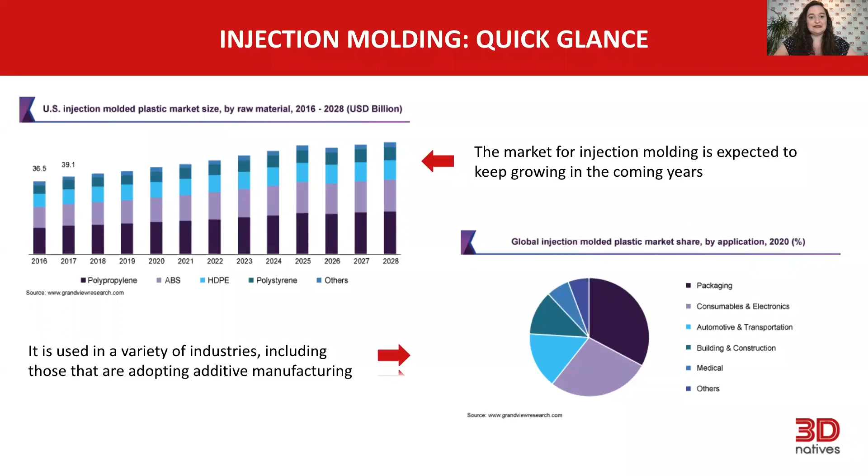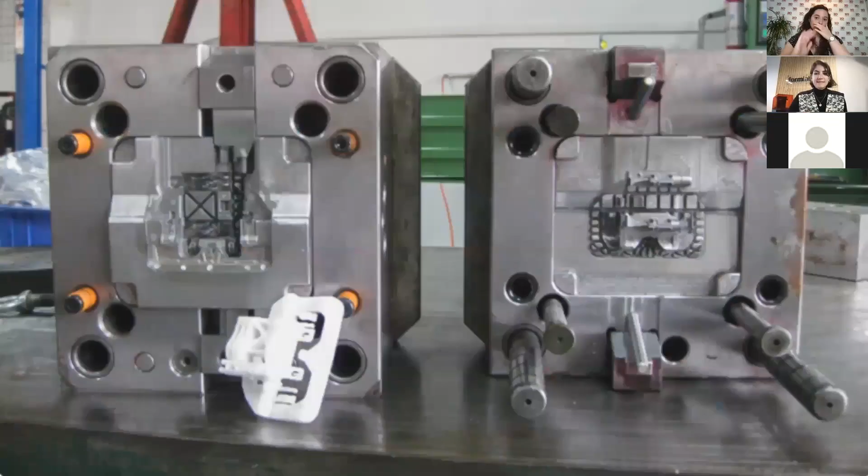One of the downsides and difficulties in injection molding is tooling. As I mentioned, it requires the use of a mold to shape the part, and molds can be very expensive, generating quite some lead time to produce. Here's an example of a mold. It's traditionally made of metal by CNC machining most of the time. Typically a mold can cost anywhere from 2,000 to 100,000 euro, depending on the geometry. If it's a complex design, complex geometries, it will be much more expensive, and it can take 4 to 8 weeks to produce. So this is mold making for injection molding. It's not really flexible, and it can really slow down your process and your product development.

So we'll be very curious to know, how do you currently manufacture your injection molds? You'll have another poll question coming into your screen right now, and if you could share your current process.

So are you doing in-house metal machining or outsourcing metal mold, or are you already using 3D printed mold, either in-house or outsourced? If you're using any other method, I'll also be curious to know.

So I'll let a little bit of time pass. I guess Madeleine, just let me know whenever it's answered already. Perfect, and now we can see the result. All right, so actually most of the people here are outsourcing metal mold.

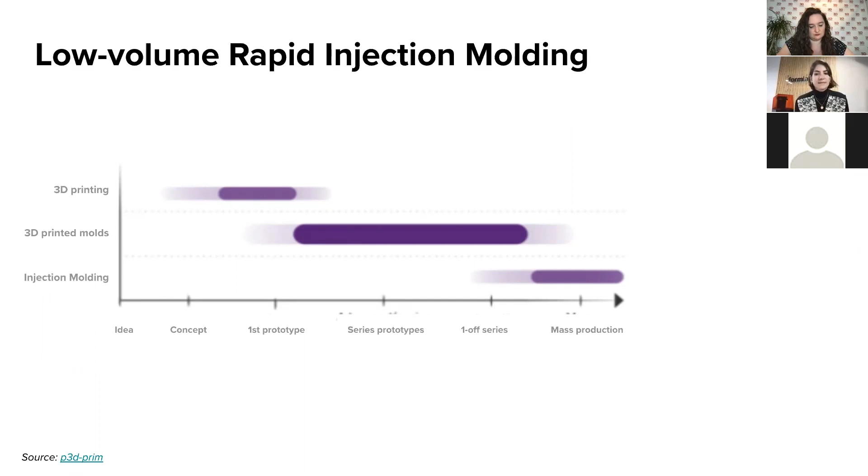That being said, I'd be curious to know why you are interested in doing low volume production, low volume injection molding. You'll have another poll question coming to your screen right now.

I don't see the poll question. Ah, I can't hear you, Madeleine. Ah, perfect. All right, so I'll be curious to know why you are interested in this application. Actually, I didn't put 'other' in the solution, but if you have other uses, feel free to share in the chat or Q&A. Ah yeah, it should be multiple choice, so maybe just pick the first use that you're having. That's a good point. Oh right, interesting—limited series of end parts. That's interesting, I thought it would be more for prototypes, but I guess this is for maybe both options. But it's interesting to see the division between those three. Great, thanks for answering this.

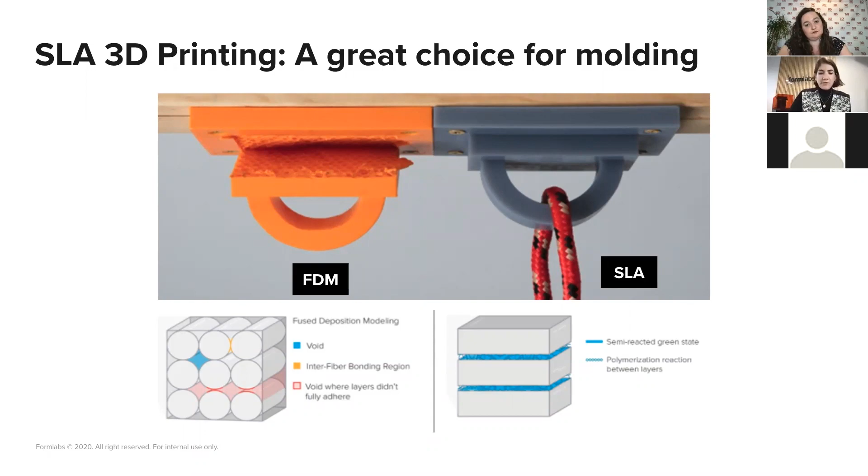And at Formlabs, we have a complete ecosystem for SLA, and we also release materials that have high thermal resistance and are really adequate for molding. This is an affordable and accessible ecosystem that is easy to implement, operate, and maintain.

So this is a good choice if you are new to this process and want to set up in your prototyping lab and just start right away without too much pain, let's say.

Now I want to show a video made with one of our partners in China that has been trying this application to validate if we can do 3D printed molds for low volume injection molding. They've been printing with our Rigid 10K resin, and they've been printing some housing boxes. So I'll just show the video.

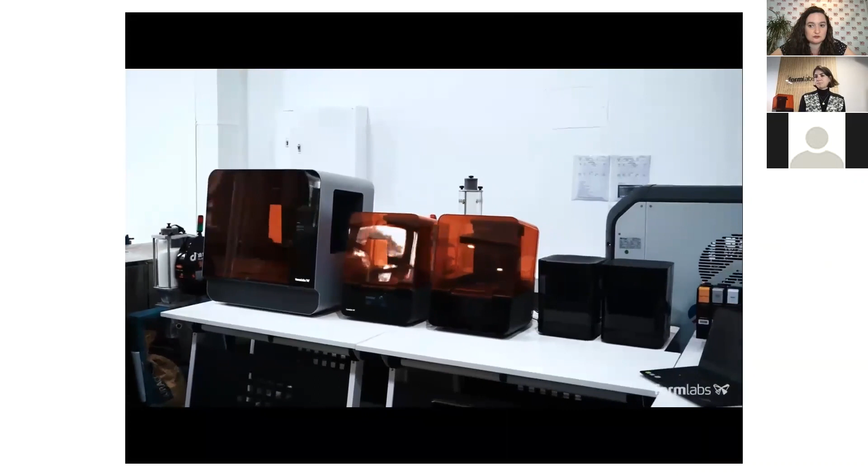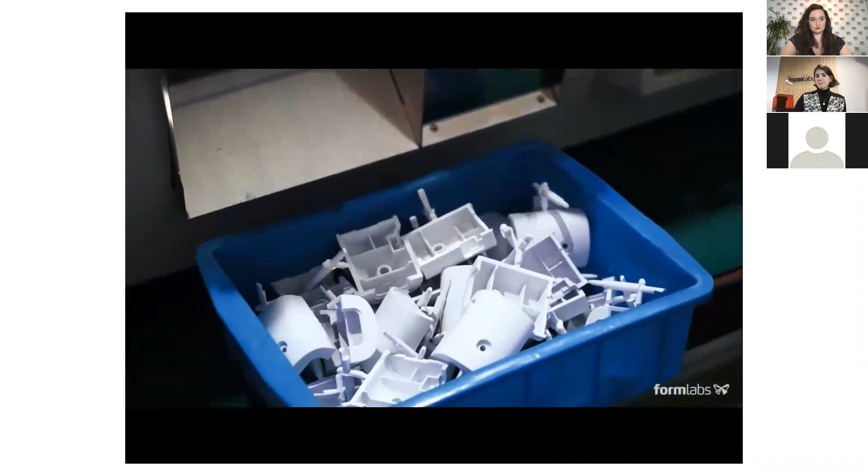Using 3D printers to fabricate molds for low-volume injection molding can reduce costs, shorten lead times, and help bring better products to market. Founded in 2005, Multiplus provides manufacturing services to over 250 clients per year, many of which require small batch production. We've partnered with Multiplus to walk you through the steps of the injection molding process using 3D printed molds.

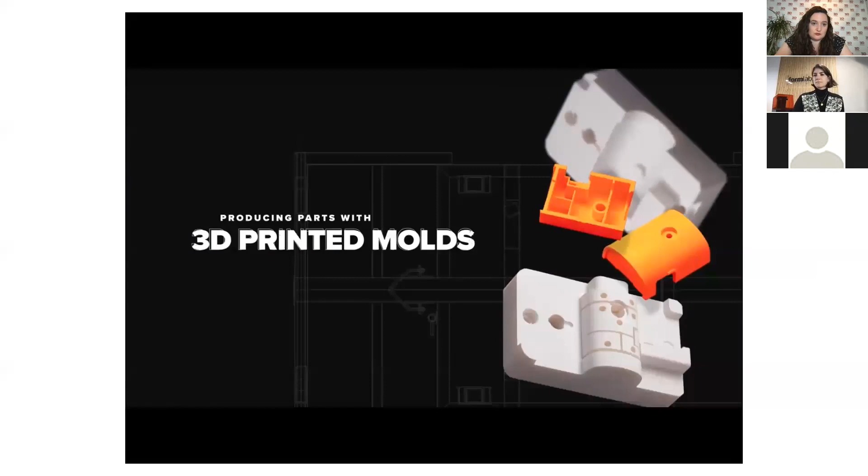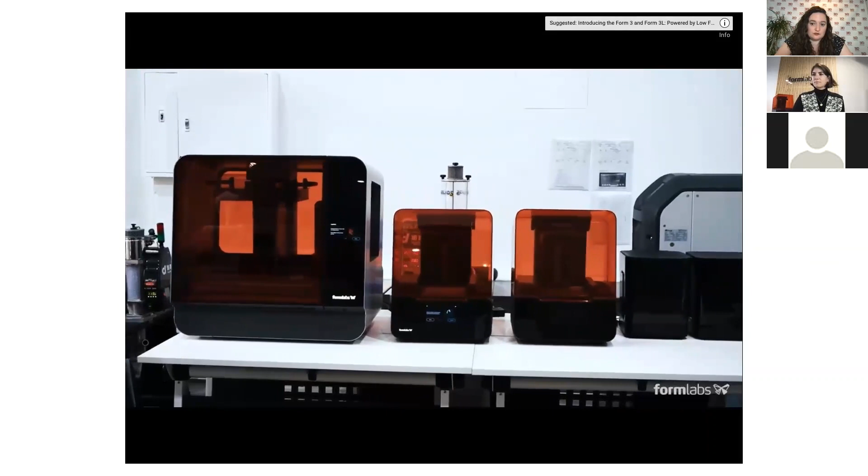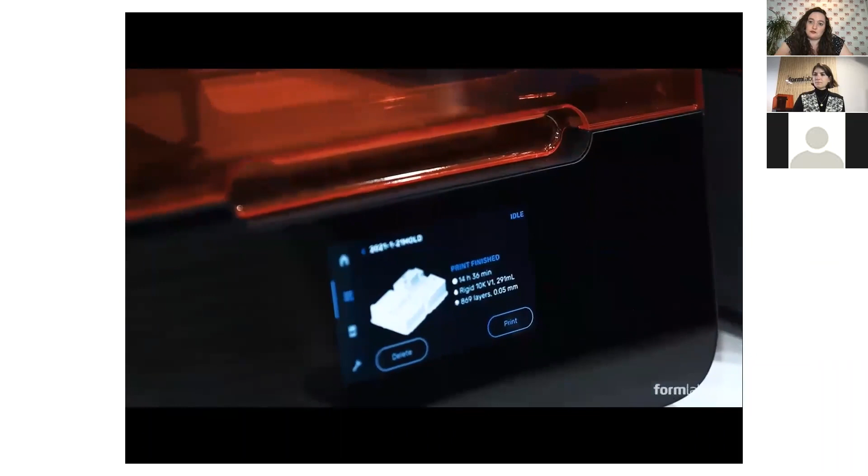Begin by designing the mold using common design for manufacturing principles. 3D printed molds can incorporate the same components as metal molds. Upload your design into Preform, Formlabs print preparation software. Prepare your print and send it to the Formlabs 3D printer. Choose a material and begin the print.

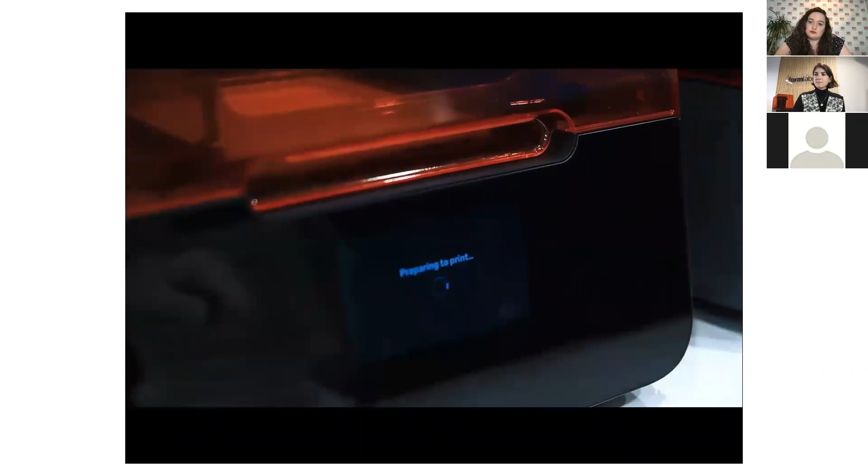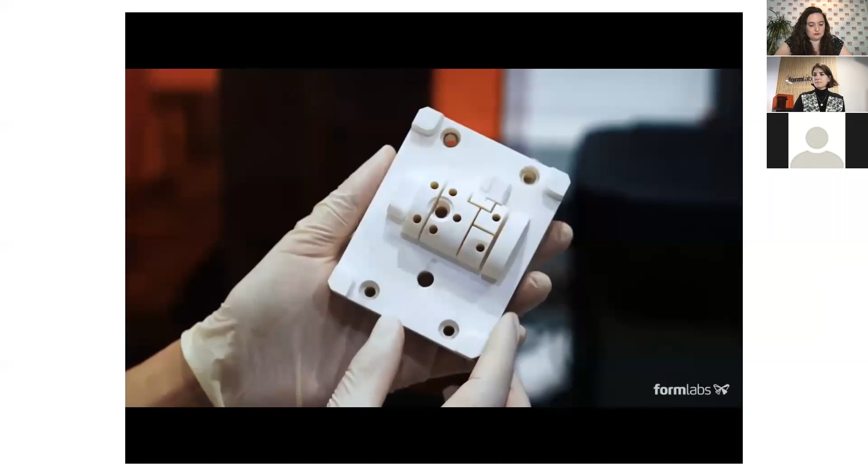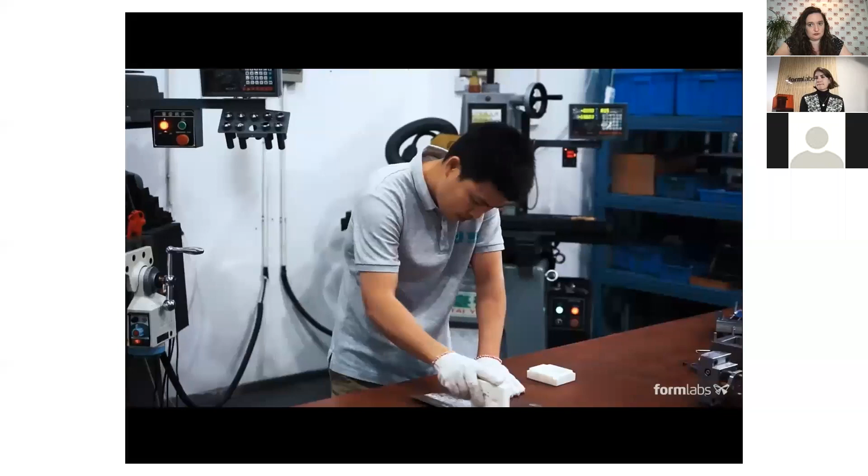Rigid 10K resin combines high strength, stiffness, and thermal resistance, making it an ideal material for injection molds. All SLA 3D prints require washing and post-curing to bring parts to their optimal mechanical and thermal properties. In just a few hours, your 3D printed mold is ready for assembly. 3D printed molds are often designed to fit within standard metal frames, which extend the lifetime of the mold. Prior to assembly, you may choose to sand or machine the mold to meet critical dimensions.

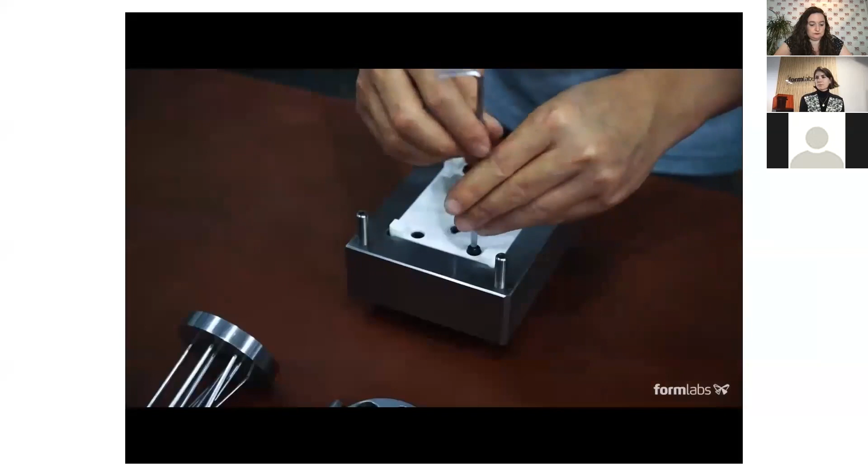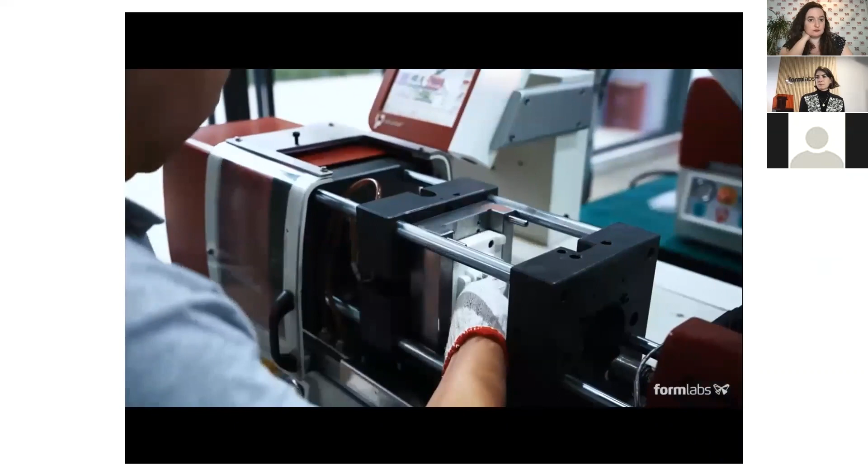Assemble the 3D printed mold inside the metal frame. Ejector pins can be added to automate demolding. The mold is now ready to be used. Install the assembled mold in your injection molding machine. Insert the plastic pellets, input the required settings, and begin production.

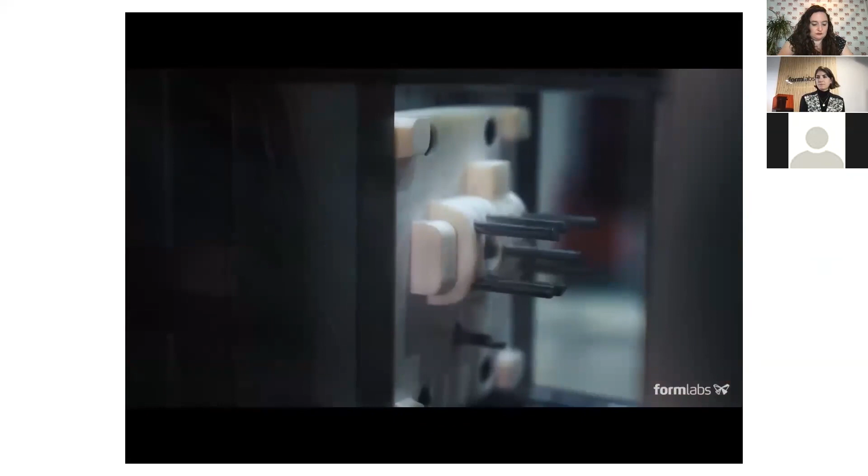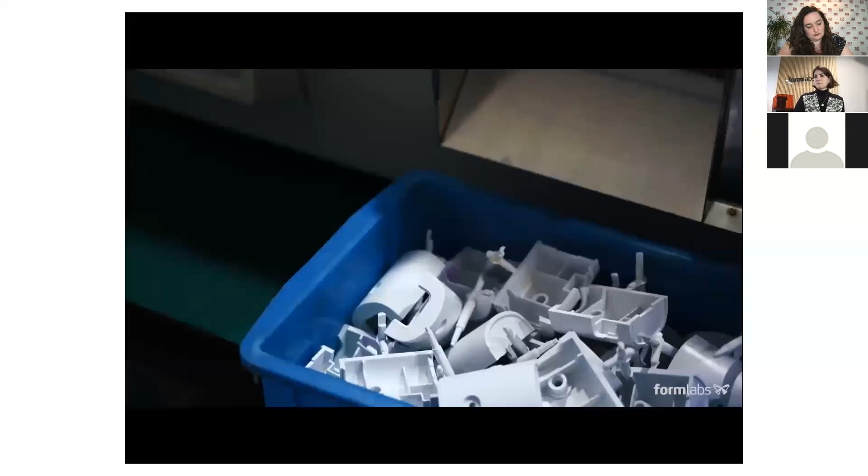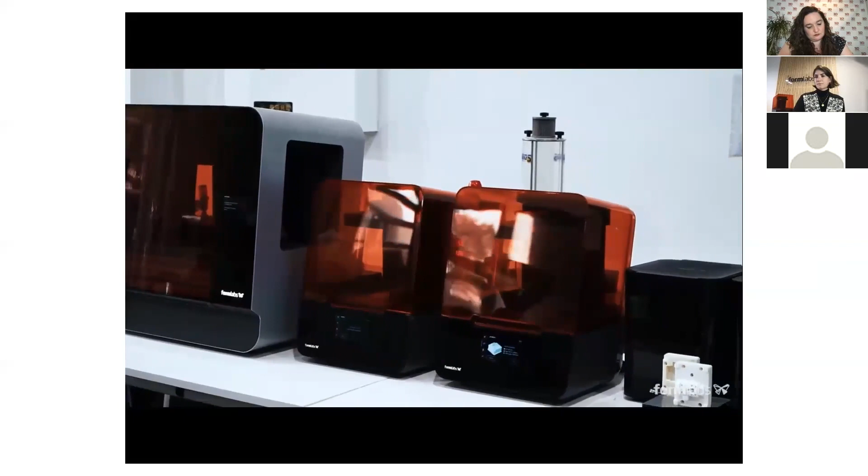Formlabs 3D printed molds are capable of withstanding hundreds to thousands of shots, depending on the part design and molding conditions. Using compressed air can accelerate cooling time, which is typically longer with plastic molds. Whether you're looking to design functional prototypes with end-use materials, fabricate pilot production parts, or manufacture end-use parts, using Formlabs 3D printers to fabricate injection molds is a cost-effective and quick way to produce parts in limited quantities.

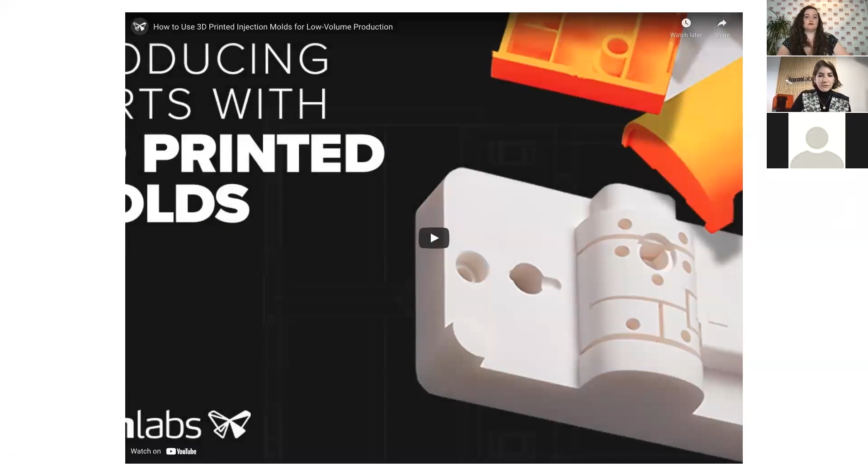Perfect. So I hope you enjoyed the video. This is, oh, that's not supposed to happen.

Right, perfect. Yeah, so that was a video to show the workflow step by step and explain a bit how Multiplus did it. Also give a bit of an understanding of different recommendations that will help optimize the process. So I will dive a bit deeper into the workflow now and also into the case study afterwards, and we'll come back to Multiplus parts.

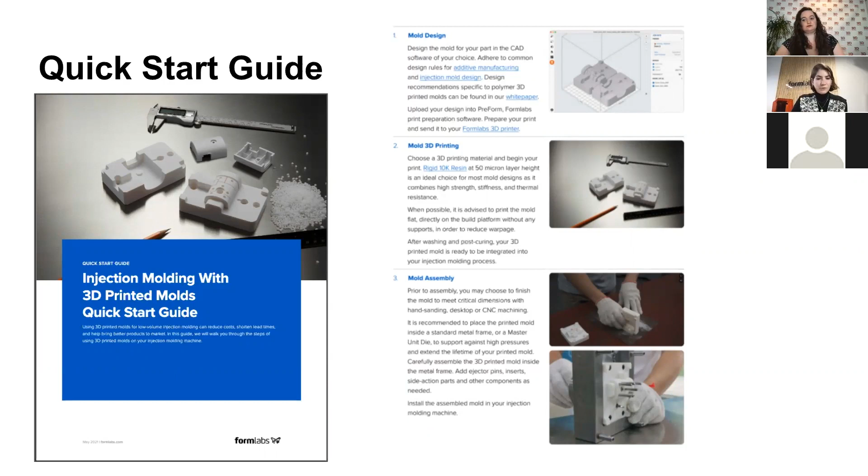So now jumping into the different phases for this workflow, starting with designing. First, designing the mold is the first step. If you're familiar with designing an injection mold, there's not much more to know. It's actually quite straightforward to adapt from a metal mold to a plastic mold.

But the one thing to really keep in mind is that 3D printed plastic molds are much more fragile, obviously. So handling the pressure and the temperature of this process will be more complicated. There are a few modifications that you can do on the design to try to reduce the pressure inside the cavity. As I mentioned, we give those guidelines in the white paper. Typically, adding large draft angles helps, adding large gates, large air vents. This will all reduce the pressure inside the cavity and increase the longevity of your mold.

Also, if small features and thin cross-sections are present, it can break more easily. This is also something that we mention in the guidelines.

One thing that you saw in the video is that most of our customers plan some stock allowance when they design, so that they can post-process the mold with machining the critical dimensions afterwards. This really helps fitting the mold together, both halves of the mold, and assembling the mold to the machine. So that's for design.

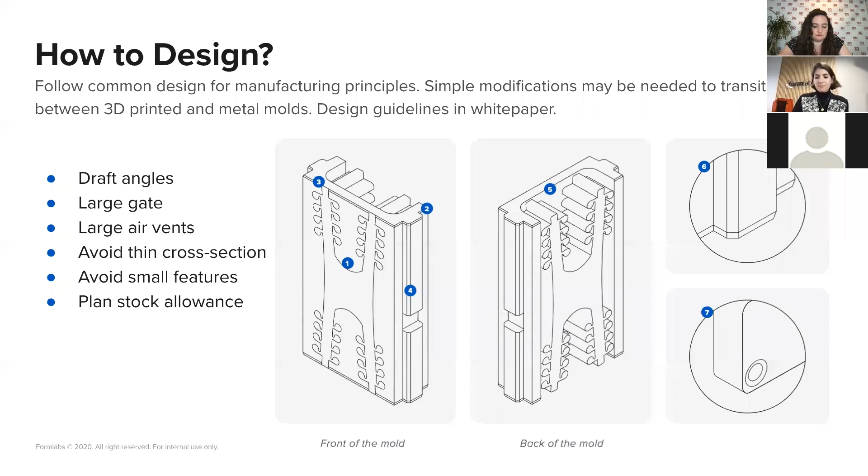For complete beginners, we have a webinar that we've done with a teacher from a Technical College in the US. He teaches injection molding and mold design, and he's using 3D printed molds in his class to teach students how to design an injection mold. We've done a master class with him. This should be helpful if you're starting from scratch, but also if you're already familiar with injection molding, he gives recommendations on how to adapt from metal molding to 3D printed molding.

Second step is how to print. Once you have the design, you need to print the mold. We have one material at Formlabs that we recommend: the Rigid 10K resin.

It's a fairly new material - we released it last year. So if you're familiar with Formlabs, it's possible you haven't tried it yet. It's a highly glass-filled material, so it has very good stiffness. It's strong, and also has very high thermal resistance, an HDT of 218 degrees.

So this is a very good balance between handling the temperature of the process, but also being stiff enough to handle the pressure.

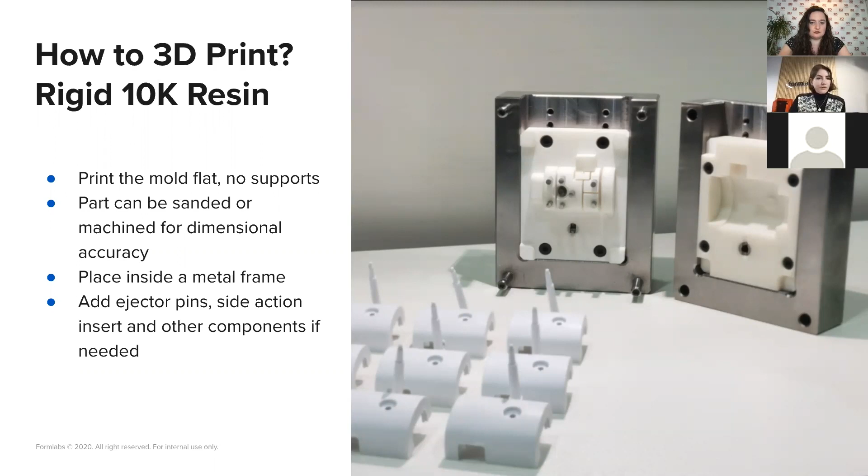As I mentioned before, we've been working with a lot of different customers. There is no one way to do it because it will depend on the geometry of your part, the material injected, the temperature, and the pressure. So we wanted to gather in this data table all the different process conditions that our customers have tried.

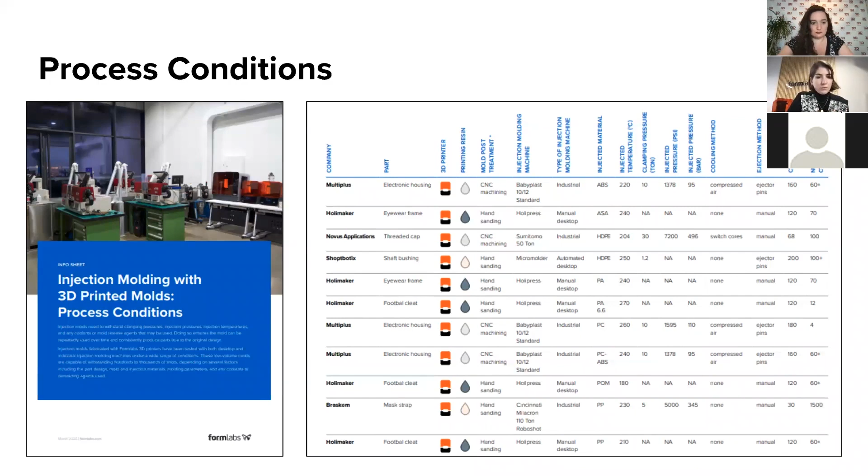Obviously you can't read it right now, but this just shows the format of this document. You can find feedback from a lot of different users with what injection molding machine they used, what material they injected, what temperature, what pressure, how many parts they got with one mold, and at what cycle time. This should be a very good reference if you're thinking about doing this process and wondering if it's going to work with your conditions.

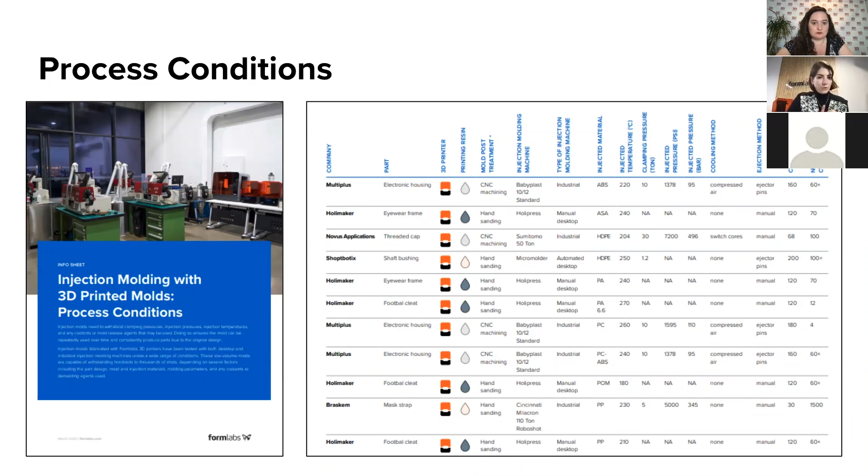I just wanted to pull a few pieces of information from this table. We injected a lot of different materials - when I say we, I mean our partners and customers. Here are the ones that we can say work: TPE, PP, PE, ABS, as listed here.

In general, injection temperatures up to 250 degrees have led to about 100 iterations per mold. When we went higher, to 260 and 270, we had about 10 iterations. So it gets much more difficult at higher temperatures.

We also saw, depending on the type of plastic injected, that some materials were easy to inject, like polypropylene and PE. Some are more complicated, like nylon or polycarbonate. So we usually get about 100 parts for materials that are easy to inject, and just about 10 parts for those that are a bit more complicated.

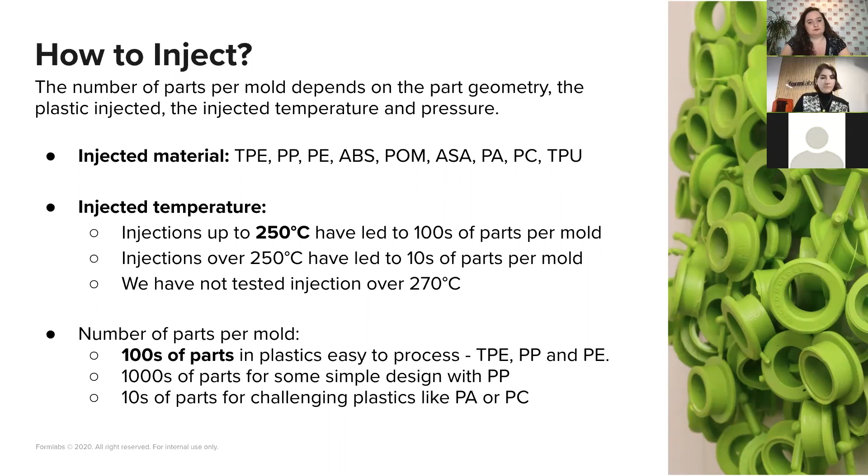All right, so now I want to dive into some user stories.

Those are concrete examples of customers or partners who have done testing with a lot of different machines. You can also find those stories on our website - we have blog posts and white papers about it. Again, that information, and in particular the technical data, is available in the table I just showed before.

So first I want to come back on this video that I just showed. As I mentioned, this is a partner from China called Multiplus, and they've injected a control box housing for home appliance. They've also tested a lot of different geometries like bottle caps, some that were commonly produced in low volume, and they tested different materials like PP, ABS, polycarbonate, and PC ABS.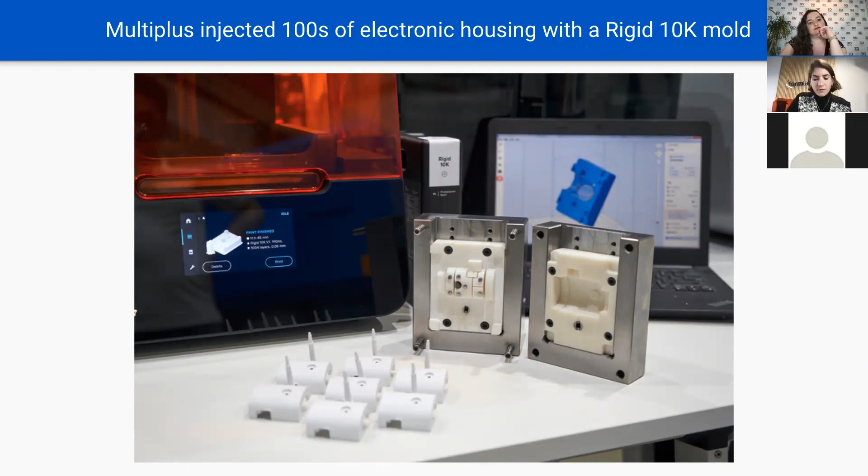So for all of them, they gathered all the different results, and most of the time they got about 100 parts, or lower, but the mold didn't break, they just didn't test further. You can find all those different tests in the user story.

They were using a small scale hydraulic press, an industrial press from the brand Babyplast. So this is a complete industrial setup. They had the injection molding room, but they also had the assembly room, as you could see on the video before. And as I mentioned, they were machining the mold before assembly into a metallic frame.

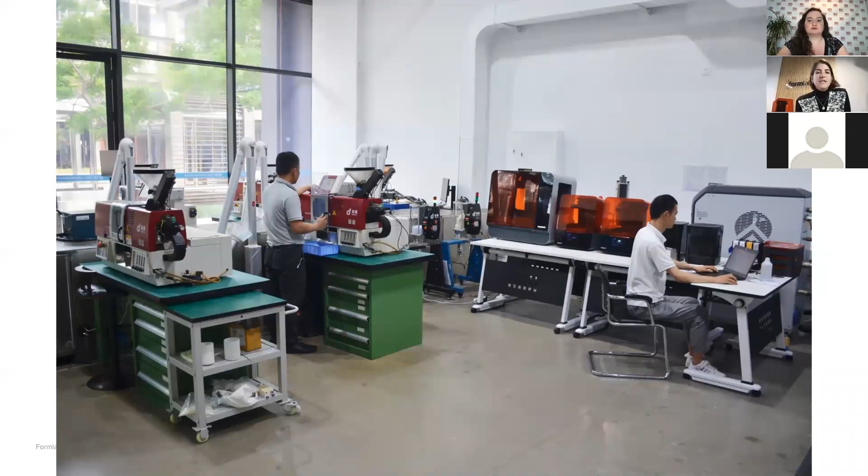So you can see here an example. This is the geometry that you can see in the video. This is to show you a bit an example of geometry that works well.

A second use case that we mentioned, a customer that we've been working with, is the company called Novus Applications. They are a product development company, and they also need to produce low volume production for series of prototypes for the customer. So this is really something that comes back very often for them. They are experts in molding, they've been injection molding for years and years. And they actually were beta testers for this material, for the rigid 10K material.

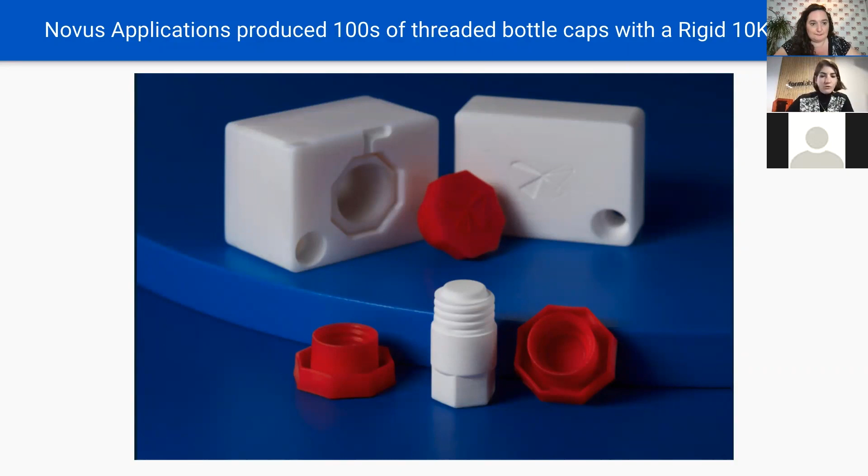So they're using as well an industrial press, an all-electric Sumitomo 60 ton press. And they injected about hundreds of parts with quite a complicated mold. It's a 3-part mold that has also a side action part, as you can see on this slide, and this is to inject a bottle cap.

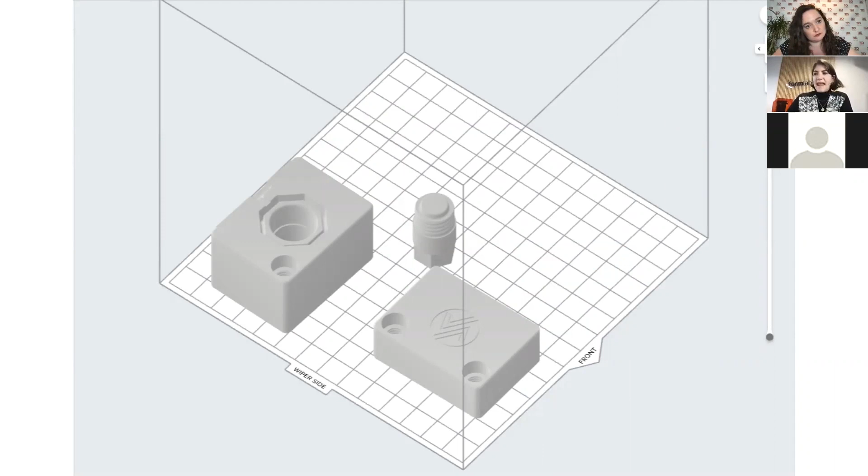Pretty common piece for injection molding. You can also see here in the PreForm software. So this is really a good example of a delicate part, with a side action core and a 3-part mold, that was successful for about 100 iterations.

Another case that I want to mention is a company called Braskem. We've also done a webinar with these two customers, Braskem and the Novus Applications I just mentioned. This webinar is very interesting because they share all the design process and all their recommendations for injection molding with 3D printed molds, so I really recommend checking it out. There's also a very interesting Q&A session at the end, so I think this is very good learning.

So Braskem is one of the leading material suppliers for injection molding. It's a big material company, material supplier, and they are doing some innovative projects to find solutions for temporary molds, to help their customers have access to temporary molds and gain flexibility in production with on-demand mold fabrication.

So they tested this application with an internal project during the COVID phase, where they had to produce about 6,000 mask straps for the employees. They were under a lot of time pressure, actually. And for them, standard 3D printing would not have been an option, while direct injection molding was obviously way too long to produce the molds.

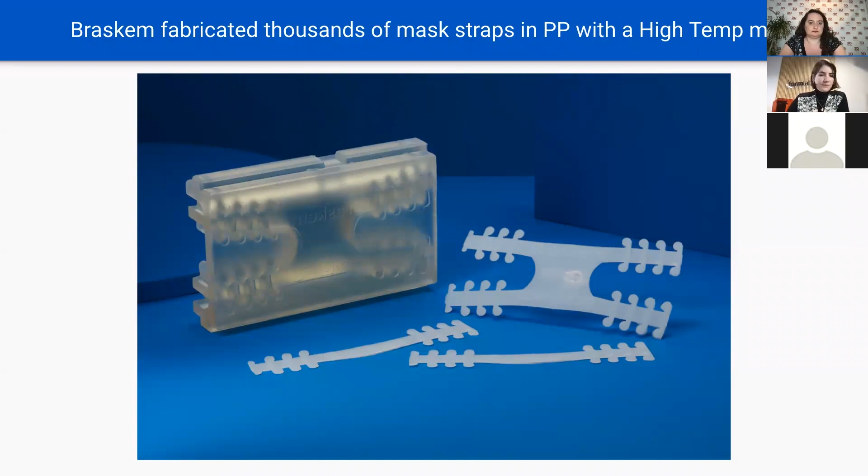So this is when they actually started doing 3D printed injection molds. And they managed to print thousands of mask straps with only one mold, getting 1,500 iterations per mold. That's pretty interesting. They were injecting on an industrial press, an all-electric Sumitomo 60-ton press, and they only needed 2 days of lead time from idea to production.

So that's really an example of how quick they can be reactive, how quick they can go from idea to production with this method. Producing thousands of parts from the moment they decided to do it, they needed only 2 days.

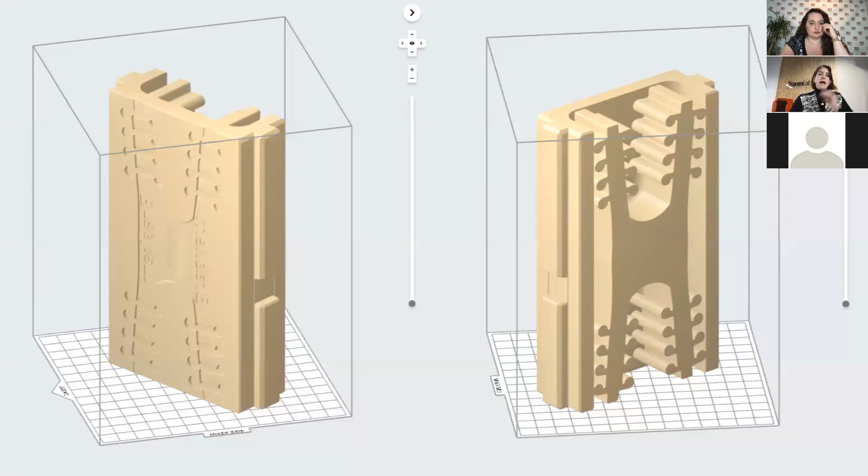So here's an example, a picture of the mold and the design. This is a design that is pretty simple, with very flat geometries, not too many internal features. This also explains why they got such good results with thousands of iterations per mold. They also had very large gates, as I mentioned before in the design guidelines, large vents, and no thin cross sections. So as I mentioned, the geometry will have a huge impact on the longevity of the mold.

All right, so that's for Braskem.

Another example I want to show is a company called Holimaker that produces desktop injection molding machines. A lot of people are interested in this process but don't have the equipment in-house yet, so we've been working with a few different desktop manufacturers for injection molding machines, which are very easy to use and set up. Obviously it's small scale, but it's a great solution if you're new to the process and want to start prototyping parts with the final material and do small series.

So Holimaker, as I mentioned, is the manufacturer of this machine, and they offer feasibility studies for their customers. They produce series of hundreds of parts for each customer and help support design and technical feasibility.

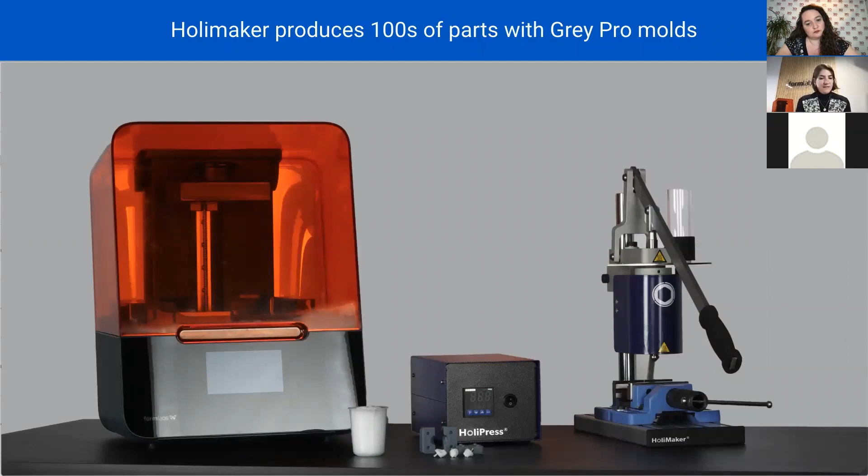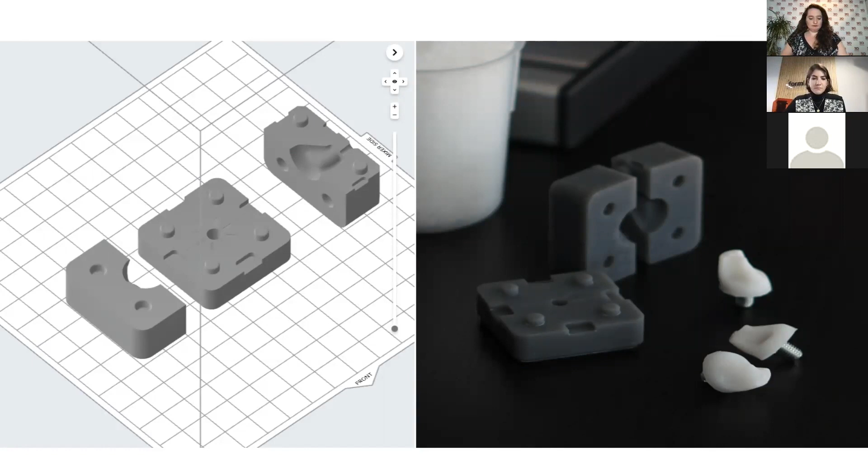I just want to show a few designs. This was some soccer cleats that they've done, some face shield clips, and some eyewear as well. Just some ideas of designs.

One last use case I want to mention is a Technical Research Center in Plastic and Composites from France that we've been working with. They've run an extensive study about 3D printed injection molds, and we have a white paper, a technical study, published with them that we will also post in the link. It's quite interesting because they also compare different 3D printing technologies. You can find the extensive report on their website or by reaching out to them directly.

The core of the mold is printed with Rigid 10K - as you can see on the left, this white resin I showed in the example before. But they also printed the frame of the mold in SLS with selective laser sintering technology, so the frame of the mold is actually in nylon.

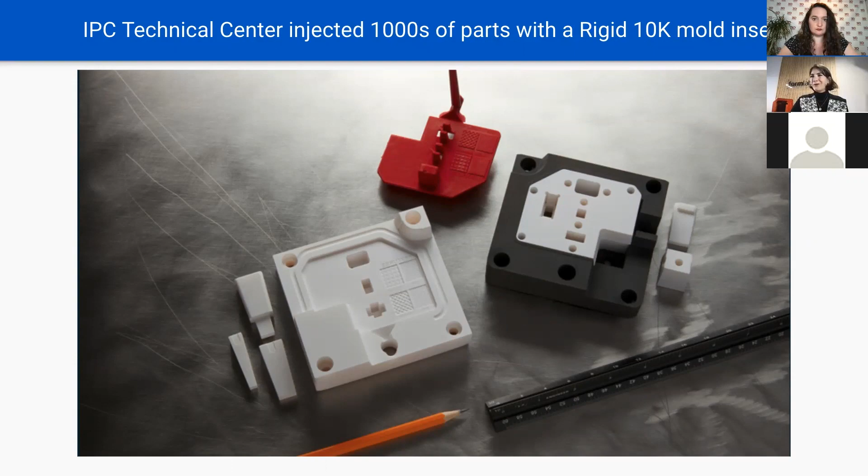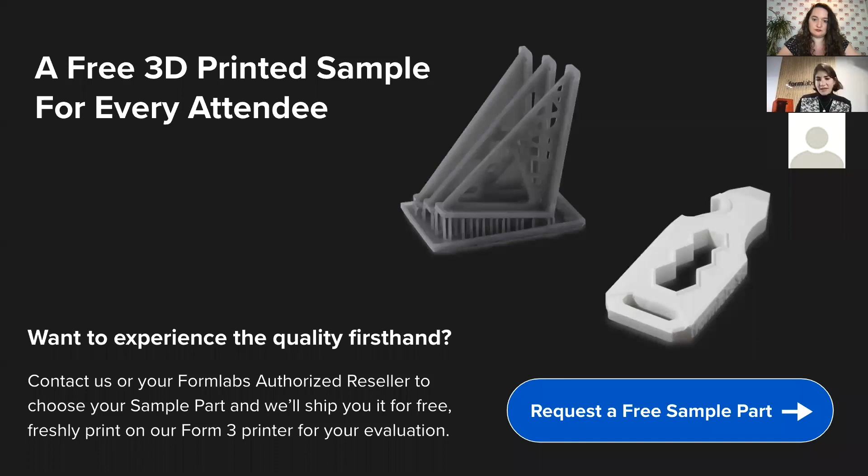So that's it for the use cases and for this presentation. I just want to thank you all and mention the next step. As we mentioned, if you're interested, you can request a free sample part to check the material - so you can check how Rigid 10K feels and performs. You can also go online and check our material tool to see what material will fit best.